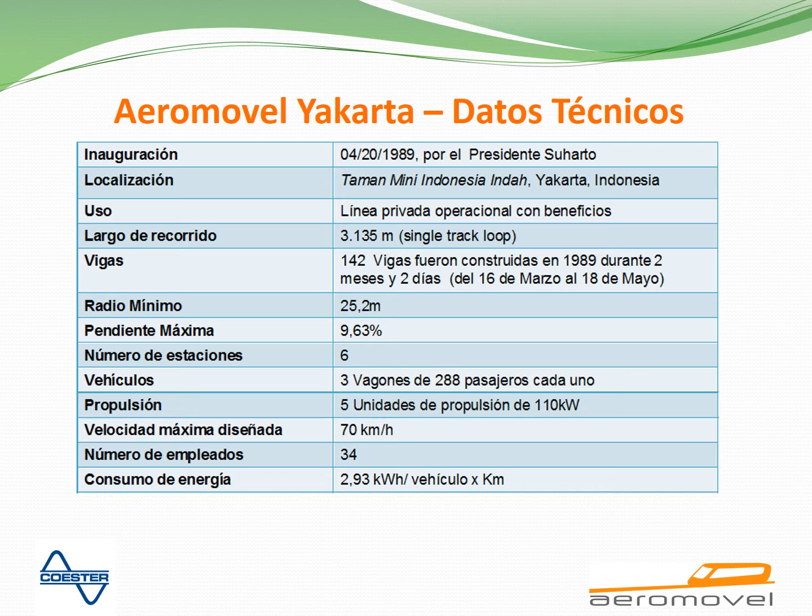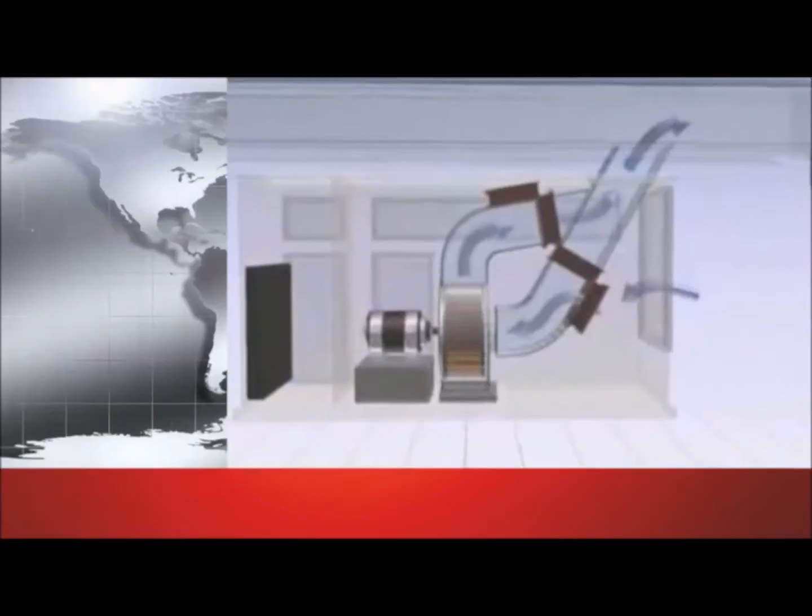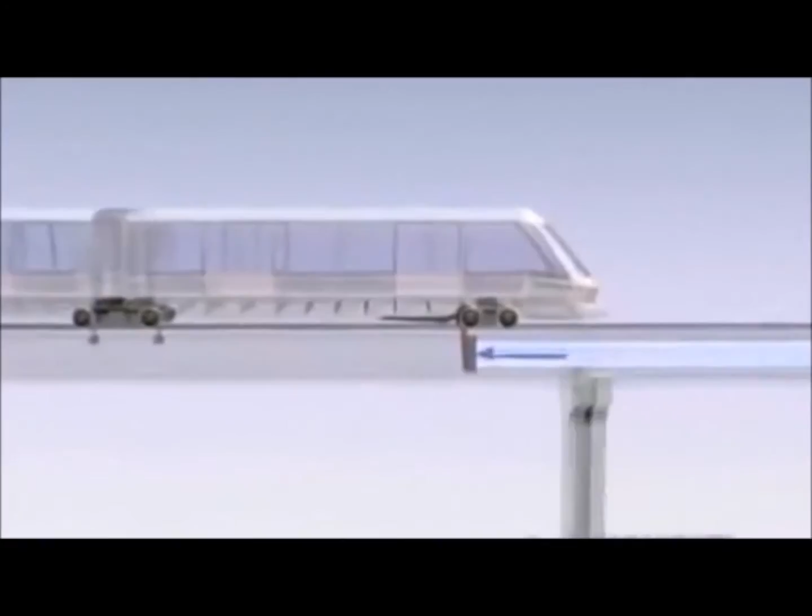The obvious alternative, of course, is a truly efficient, flexible, low-impact transit system. That's why developers, planners, and public officials today are looking more and more into the feasibility of low-cost, low-impact transit systems. Amongst those systems, AEROMOVEL offers an unusually cost-effective solution.

Like other advanced people movers, AEROMOVEL's basic design addresses common transportation problems. The power source is quiet and non-polluting. Elevated guideways literally lift the trains out of the way of traffic congestion. The lightweight vehicles and support structures help to reduce capital costs. And finally, the small footprint of the support column requires an equally small right-of-way, which translates into significant cost savings.

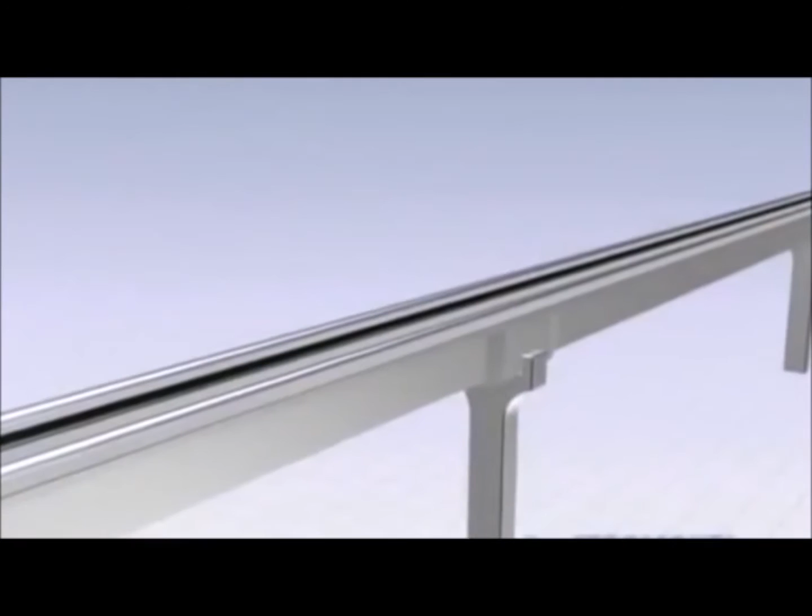AEROMOVEL employs a truly unique technology, the goal of which is to reduce cost through simplicity. The name AEROMOVEL is derived from the three terms that define the concepts: aerodynamic, movement, and elevated. And that is literally the secret of AEROMOVEL's cost-effective design.

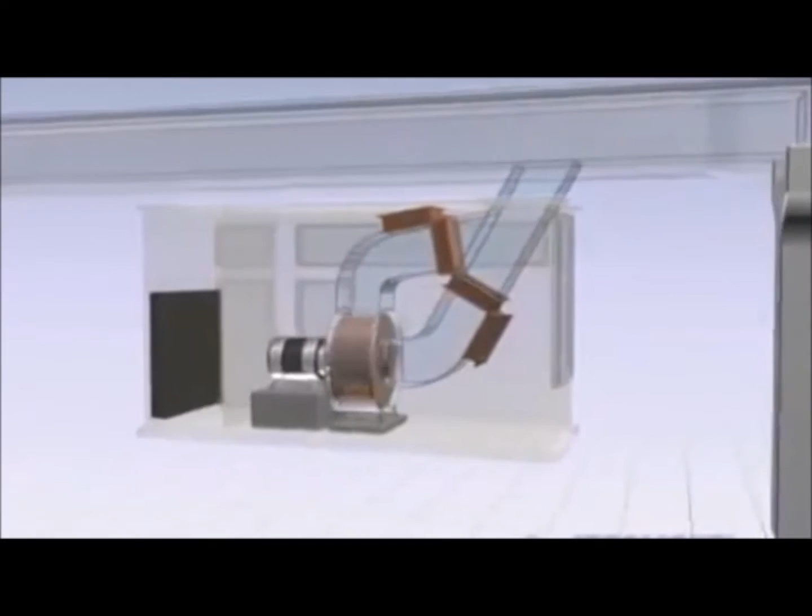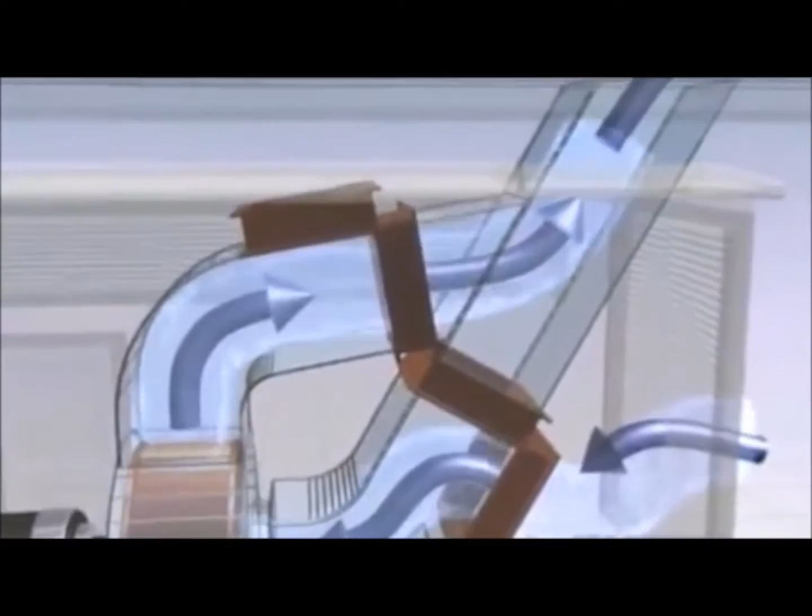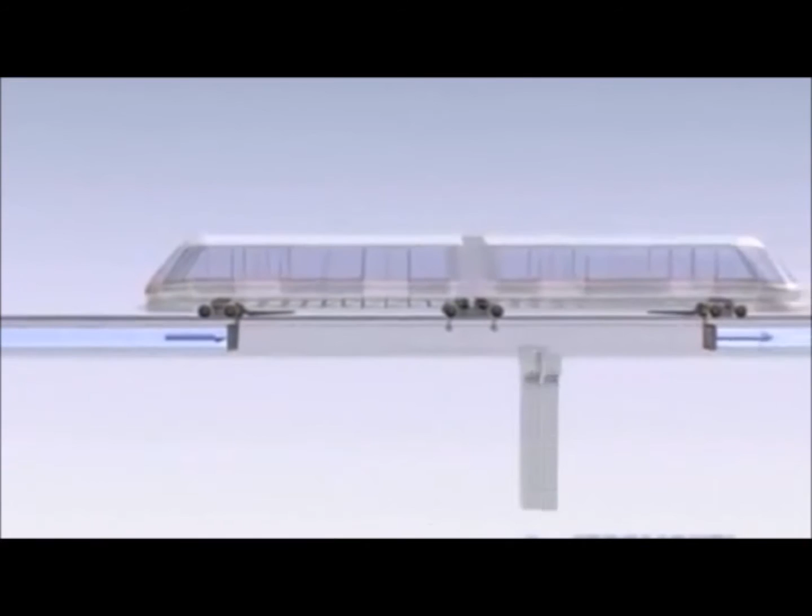Unlike most transit systems, there is no onboard motor. Instead, the vehicle is driven by electrical blowers located under the guideway. These blowers propel air under low pressure through a duct built into the guideway. The pressurized air pushes a propulsion plate attached to the bottom of the vehicle. This propulsion plate acts like an upside-down sail, propelling the vehicle forward and helping to stop it when the airflow is reversed. Of course, friction brakes are used for precision stopping.

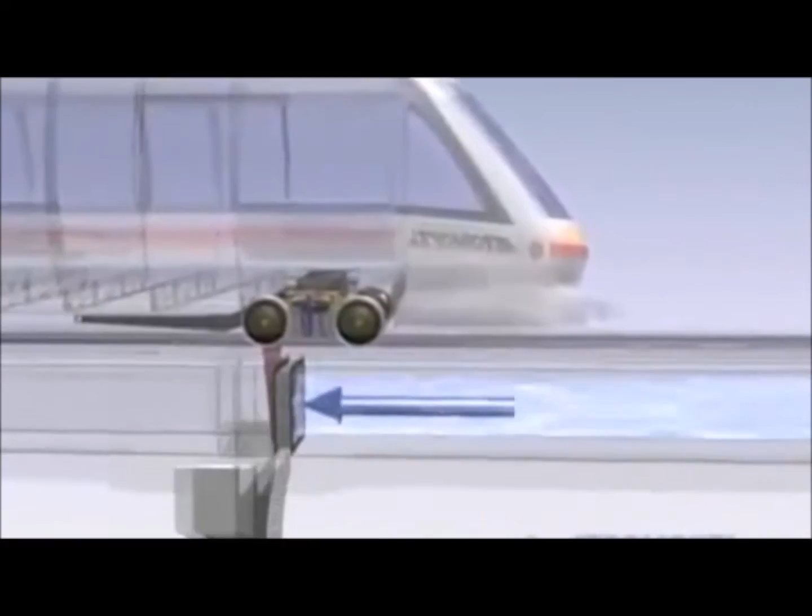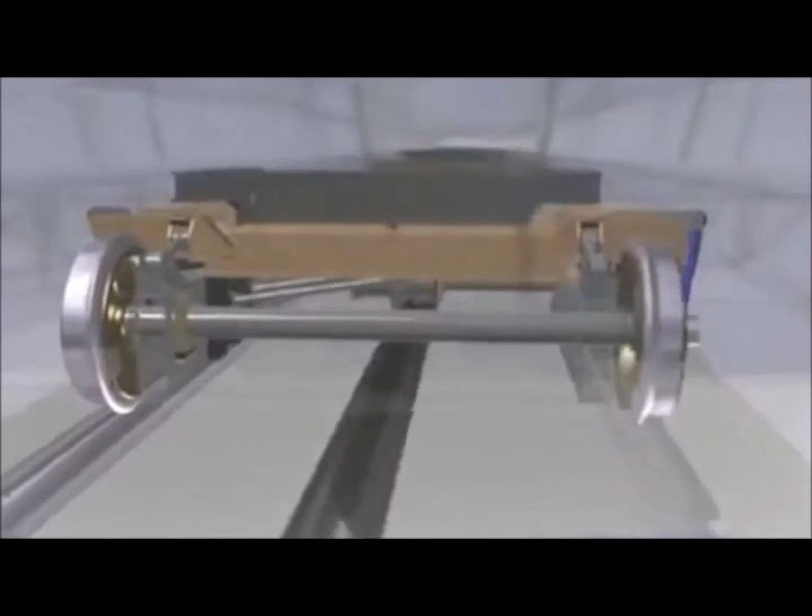The propulsion plate is isolated from the exterior of the duct with a durable rubber seal. Because the power source is separate from the vehicle, the cars themselves have few moving parts and can be made very lightweight. Under the cars, you'll find steel wheels riding on steel rails, a very efficient and cost-effective solution. Because of their lightweight strength and efficiency, these vehicles can carry 2 to 3 times more people per ton of dead weight than most alternative systems.

AEROMOVEL's elegantly simple technology has been proven in Porto Alegre, Brazil, where a full-scale system has been in operation since 1983, and in Jakarta, Indonesia, where the trains have been in commercial operation, reliably carrying passengers since 1989.

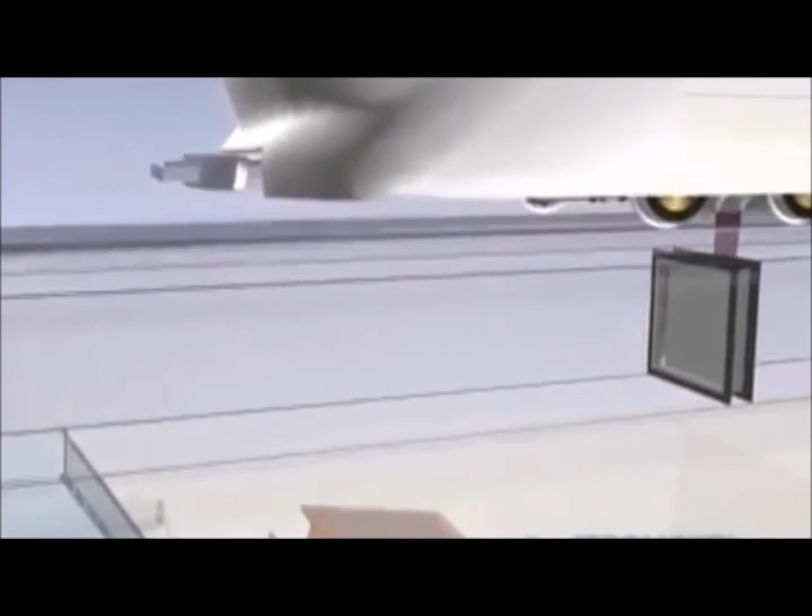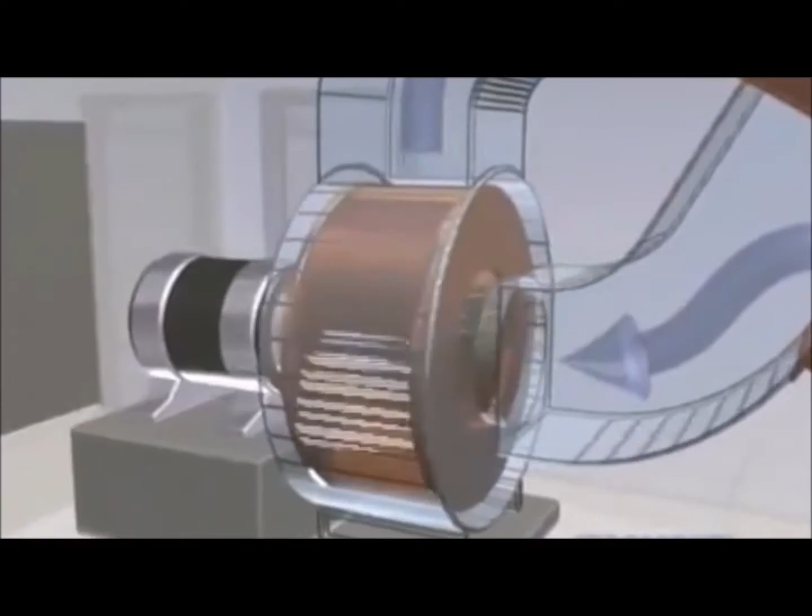One of the keys to AEROMOVEL's low cost and high reliability is its use of proven industrial equipment. The power source, for instance, is composed of industrial electric motors and blowers. The cost-effective reliability of these motors is only increased by the fact that they are mounted on a stationary platform, reflecting AEROMOVEL's commitment to simple, cost-effective design.

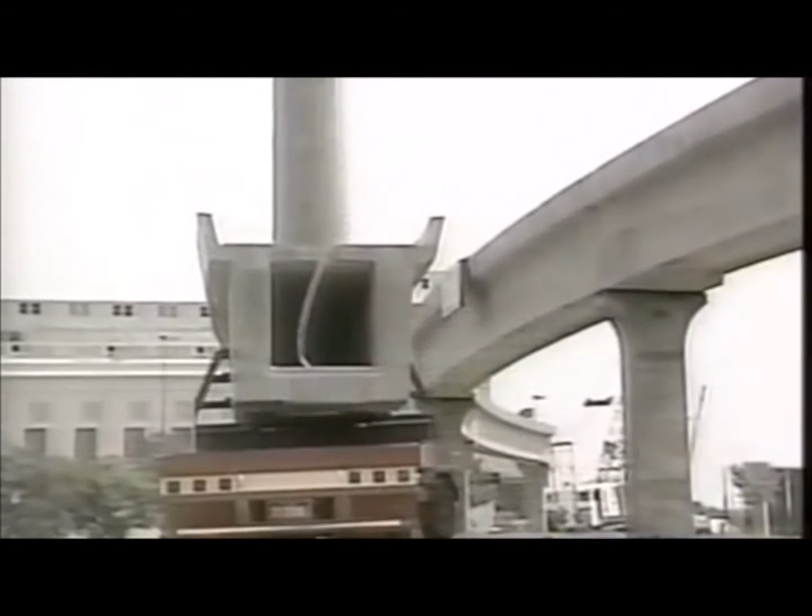The guideway, and sometimes the support columns as well, are prefabricated in modular sections. This makes for rapid construction, with minimal disruption to the surrounding area.

AEROMOVEL is also committed to low-cost operation. The automated train has automatic operation, with no drivers and unsupervised station departure for trains. Maintenance is reduced by the fact that the vehicles themselves are so simple and the standard working parts so durable. In fact, routine maintenance can be performed right at the passenger station during off hours, reducing the need for costly maintenance yards and spare vehicles.

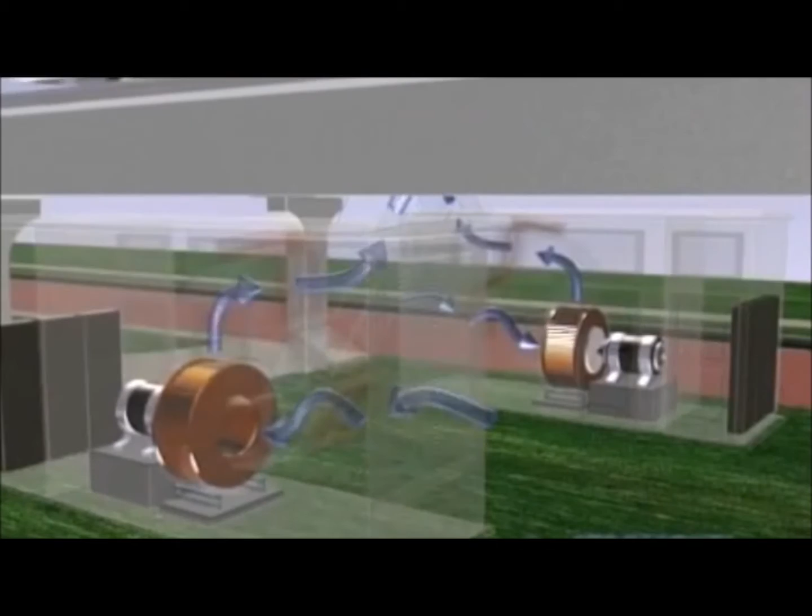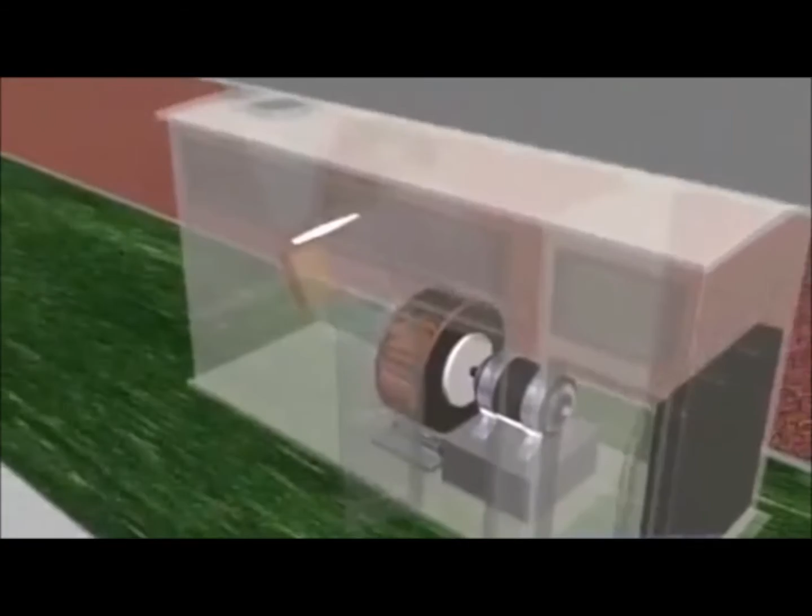And if one of the ground-based motors goes down, adjacent motors act as a redundant propulsion system, allowing the trains to continue functioning. Meanwhile, maintenance crews have full access to the propulsion system without having to interrupt service. This also avoids the cost of purchasing, storing, and maintaining spare trains.

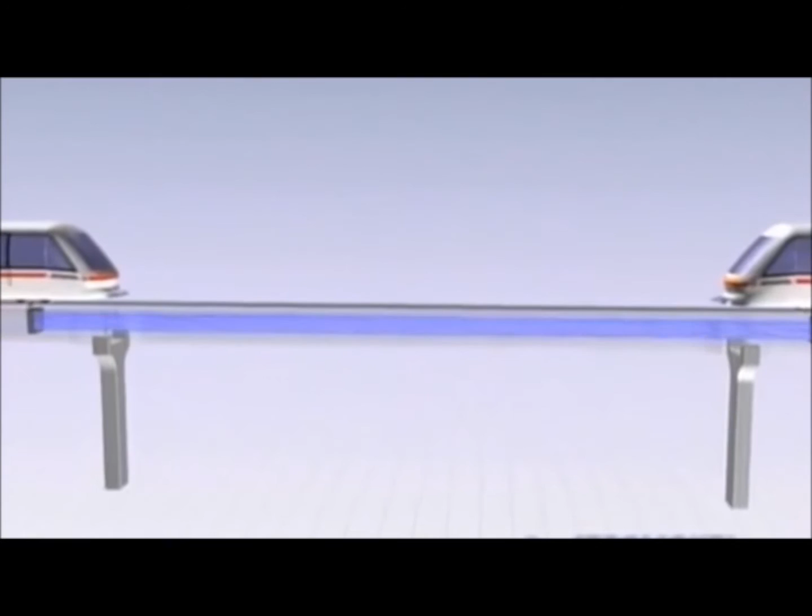AEROMOVEL's commitment to low-cost design and operation is coupled with a commitment to passenger safety. In fact, safety is built into the very design of the system. The air buffer between propulsion plates, for instance, automatically helps to prevent collision between vehicles. If, under extraordinary conditions, two vehicles begin to approach each other, the air in the duct would compress, acting like a cushion to slow and then stop the vehicles before impact.

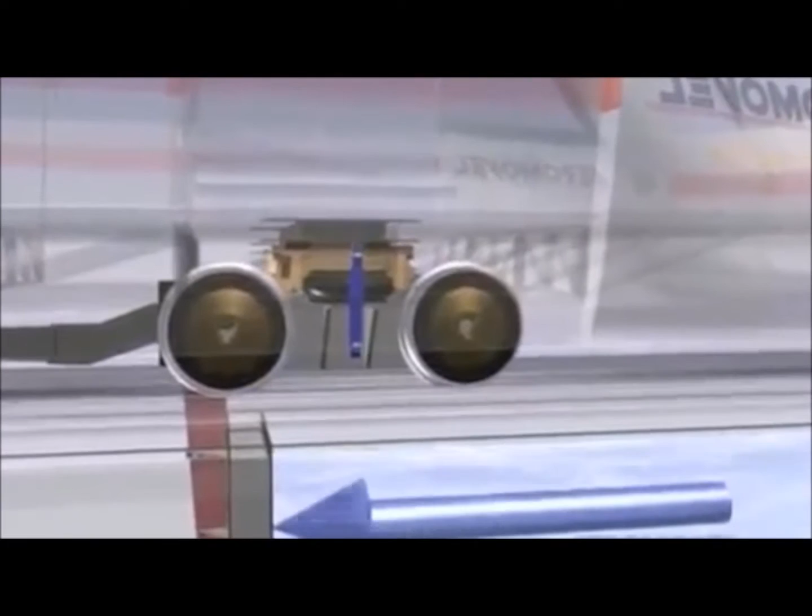The same propulsion plate, which helps to create the air cushion, also works as a brake when the airflow is reversed. This pneumatic braking system, along with the standard friction brakes, gives AEROMOVEL a built-in dual braking system. The propulsion plate, attached to the bogie of the vehicle, locks the vehicle in the guideway, making derailment virtually impossible.

And, unlike many other systems, the guideway itself can act as a safe evacuation route in the event of an emergency. Passengers exit at either end of the vehicle and simply walk along the guideway to the next station.

One of the less obvious cost-saving features of AEROMOVEL is its ability to integrate easily into the existing infrastructure. Because of its narrow track and small footprint, it can be constructed on existing right-of-ways, like roadway medians or shoulders, minimizing disruptions during construction. The support structure is small enough and flexible enough to build around most existing utilities, avoiding the often enormous cost of relocating utility lines.

And unlike systems that send power through the wheels and rely on the wheels for traction, AEROMOVEL can climb grades up to 12% and negotiate curves as tight as 25 meters in radius.

In a major city, we would help the city connect their existing systems with venues that they might have, a museum, a convention center. We would bring the existing transportation system to that venue. It'll also fit into a national park because of the fact that it is very quiet, very environmentally suited to that sort of a situation.